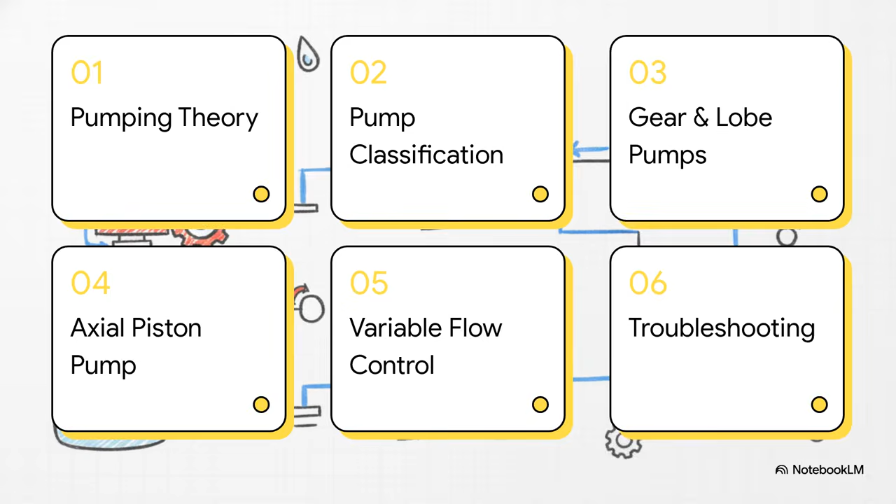All right, here's our roadmap for today. We'll start with pumping theory, move into pump classification, and explore gear and lobe pumps. Then we'll examine the axial piston pump, look at variable flow control, and finally wrap the whole thing up with some troubleshooting. Okay, let's kick things off with Section 1, Pumping Theory.

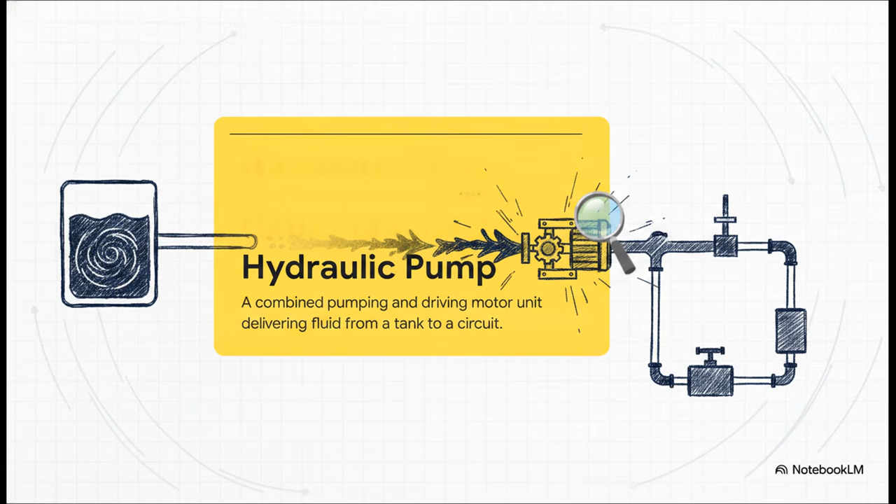Now, before we even think about moving metal parts, we really have to understand the fundamental physical challenge of moving liquid under extreme pressure and exactly how our machines actually overcome it. So, to ground ourselves, let's define what we're actually talking about here. A hydraulic pump is essentially a combined pumping and driving motor unit. Its entire reason for existing is to take hydraulic fluid, which is mostly just specialized oil, from a storage tank and forcefully deliver it to the rest of the hydraulic circuit. It acts as the primary driver. It's the thing that establishes the flow and literally wakes the entire system up.

And before we dive into the internal mechanics, I really want you to appreciate the sheer optimization of these things. When we talk about power efficiency, the ratio of output hydraulic power to the input mechanical or electrical power, these pumps aren't just good, they are extraordinary. We're talking about frequently hitting a staggering 90 to 98% efficiency. Almost zero energy is wasted.

But despite all that incredible efficiency, they do actually have a mortal enemy. It's called cavitation. Cavitation is the highly dangerous formation of tiny vapor cavities, basically little voids, in a liquid. And this happens when the fluid is subjected to a super rapid drop in pressure. Now, the real danger isn't the bubbles themselves, it's what happens next. When these voids travel into a higher pressure zone within the pump, they implode. This implosion generates these intense, microscopic shock waves that can literally pit and tear the solid metal of the pump apart over time. It's brutal.

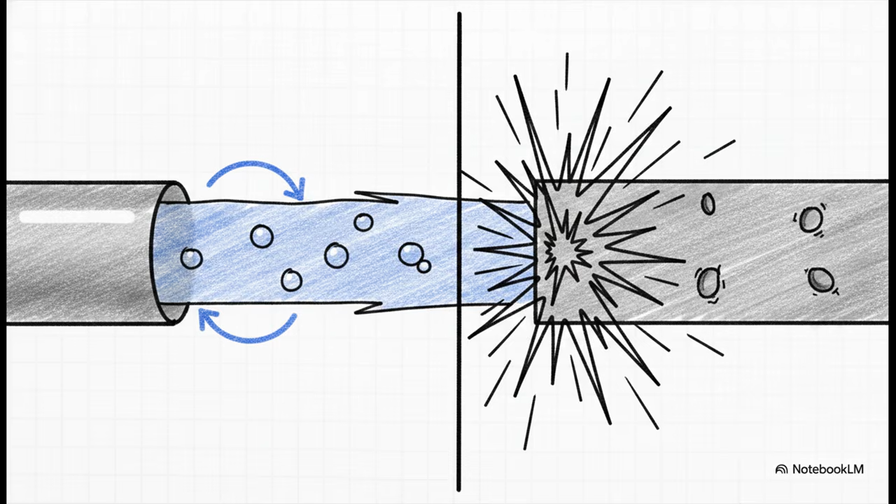So, to prevent that destructive cavitation, engineers have to be smart about system design. Think about a setup where the pump is placed above the fluid storage tank. The pump creates a negative pressure at the inlet, sure, but it's actually the atmospheric pressure pushing down on the fluid in the tank that forces the liquid up that inlet pipe. It's brilliant. To prevent those rapid pressure drops that cause cavitation, this pump lift distance must be kept as small as practically possible.

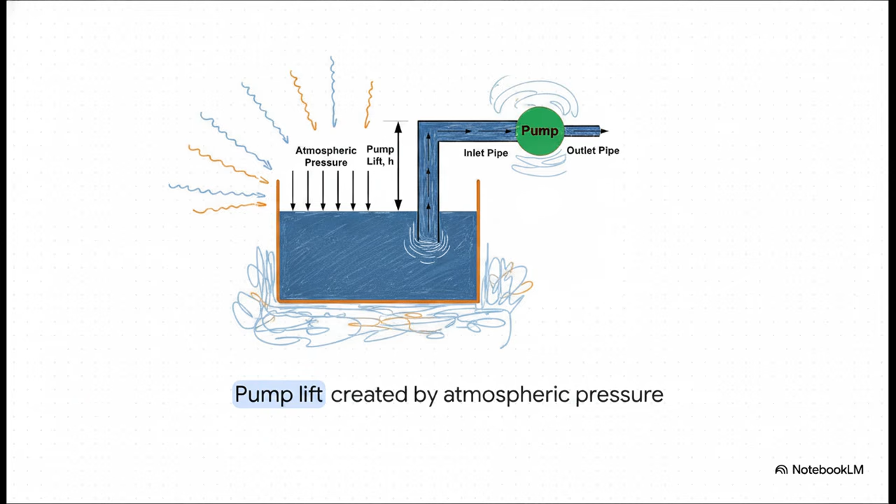Moving right along to Section 2, Pump Classification. We really need to draw a hard line here because there are two entirely different families of pumps. On one side, we have non-positive displacement pumps. Now, these are fantastic for high-volume applications, but they operate at a low pressure and their delivery varies wildly depending on the pressure at the outlet.

On the other side, though, we have positive displacement pumps. These are the absolute heavy lifters of the hydraulic world. They use super tight internal seals to trap and deliver exact, constant volumes of fluid at incredibly high pressures, completely independent of whatever pressure is fighting back at the output port.

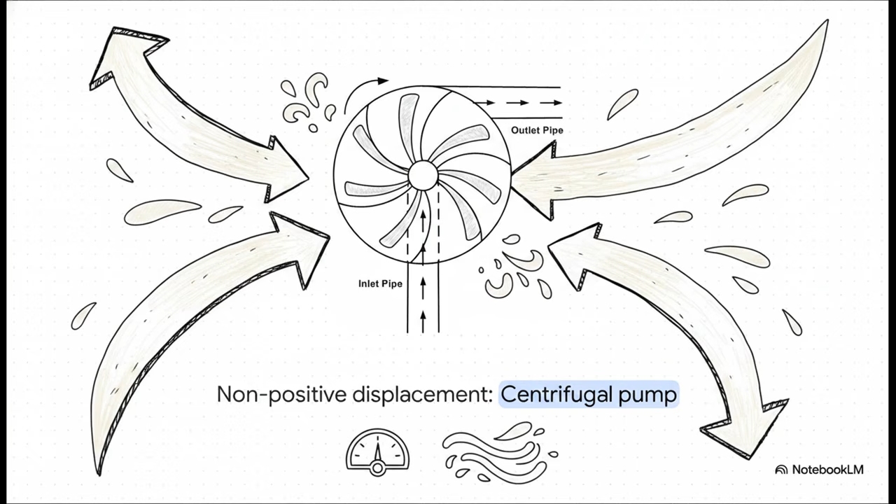Let's consider a classic non-positive displacement model, the centrifugal pump impeller. It uses rotational kinetic energy from an engine to just fling fluid outward to the periphery. Because it relies on centrifugal force instead of tight mechanical seals, it is perfect for moving massive volumes of liquid rapidly. But it's fundamentally limited to low-pressure applications, usually maxing out around 20 to 30 bars.

Contrast that entirely with a positive displacement or reciprocating pump. This acts remarkably like a four-stroke engine in your car. A piston moves down, opening an inlet valve to draw in a very specific volume of fluid. Then it moves up, the inlet closes, the outlet opens, and that exact volume is pushed out. Because of this sealed, rigid mechanical action, it delivers a constant volume with every single cycle. It doesn't care how much resistance or pressure is waiting at the output port, it just pushes it through.

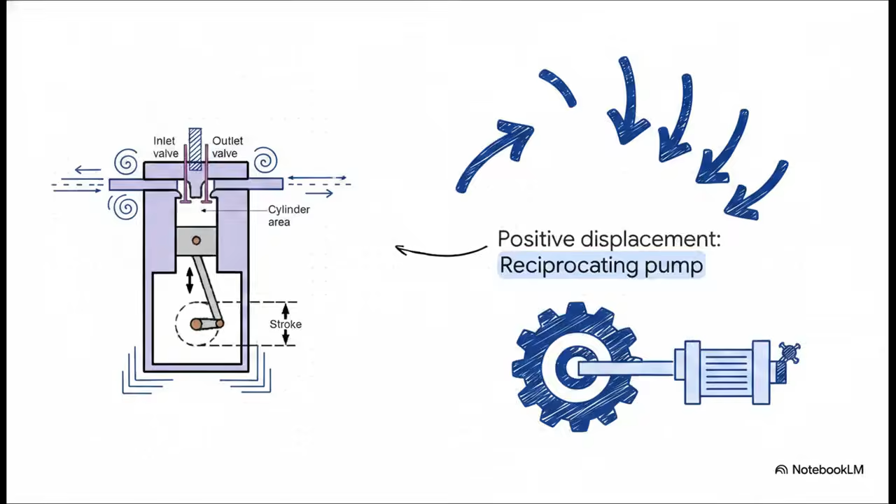All right, Section 3, Gear and Lobe Pumps. The external gear pump is an absolute workhorse in the industry. It features two meshing gears inside a housing. As the gears rotate out of mesh, they create a vacuum that draws fluid in.

That fluid is then trapped between the gear teeth and the outer casing, carried all the way around the outside, and forced out the high-pressure discharge port as the teeth violently mesh back together. It's incredibly effective, though I should mention it does have one notable drawback. The high pressure at the outlet and low pressure at the inlet creates an unbalanced side load on the gear bearings, which causes wear and tear over time.

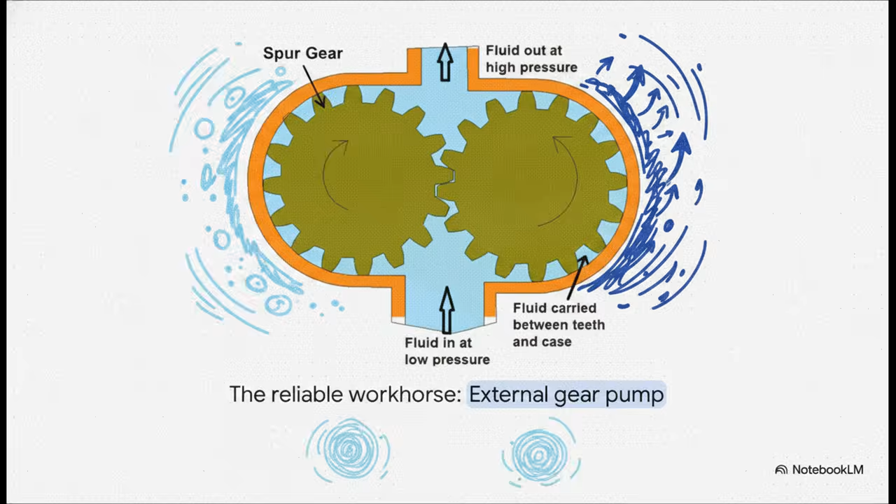Now, what's really fascinating is how the lobe pump takes that exact gear concept and adapts it for a totally different industry. The lobes rotating inside the housing do not actually make contact with each other. Instead, their rotation is perfectly synchronized by external timing gears. This gentle, non-contacting pumping action makes it a total superstar in the food, beverage, and pharmaceutical industries. You can literally pump delicate solids, I'm talking whole cherries or olives, right through this machinery without crushing or degrading the product at all.

We'll wrap up our gear tour by highlighting the internal gear pump. The absolute star of this design is the distinct crescent-shaped seal located right in the middle. Fluid enters and travels between the teeth of a large outer rotor and a smaller inner idler gear. That crescent perfectly and efficiently divides the liquid, acting as a dynamic seal between the suction and discharge ports right before the teeth mesh again to force the fluid out. It's just a brilliantly compact and versatile piece of engineering.

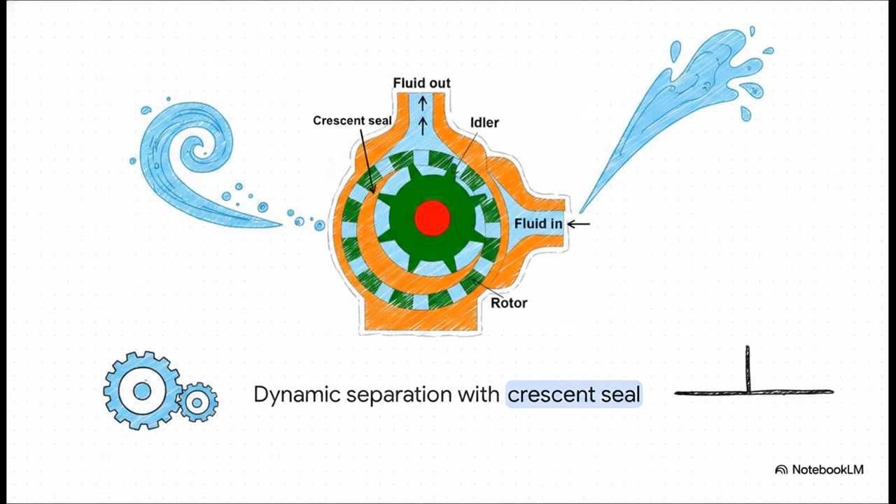Moving into Section 4, the axial piston pump. So if gear pumps are the reliable draft horses, the axial piston pump is the high-tech sports car. It represents the ultimate solution for precise, dynamic, and extremely high-pressure fluid volume control. Let's break down its continuous operational cycle into 4 steps. First, rotation. The drive shaft spins, causing the entire cylinder block and its internal pistons to spin right along with it.

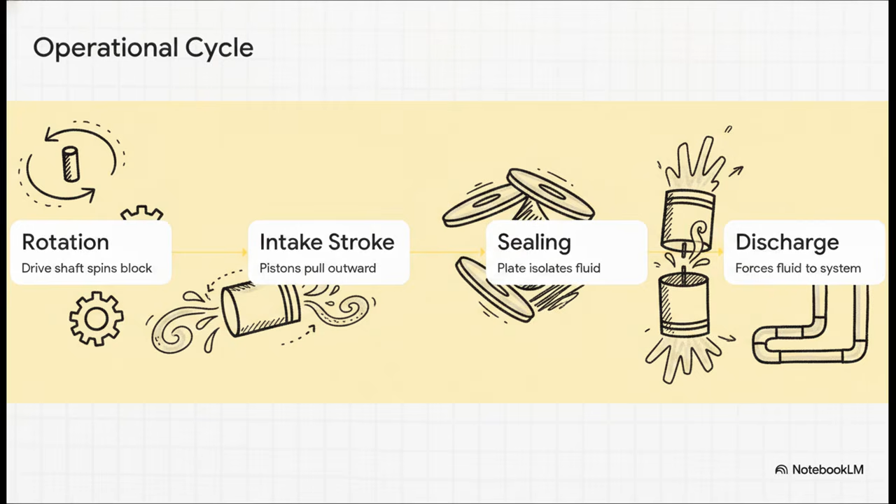Second is the intake stroke. As they rotate, the pistons are mechanically pulled outwards, creating a low-pressure vacuum that sucks hydraulic fluid into the cylinder. Third is sealing. A distribution plate isolates the inlet, securely trapping that ingested fluid. And finally, the discharge stroke. The pistons are forced violently back into the cylinder, decreasing the volume and blasting the trapped fluid out into the hydraulic system.

Which perfectly sets up Section 5, variable flow control. You might be wondering, how exactly are those pistons forced in and out as they spin? Well, the secret sauce lies in something called swash plate mechanics. This is the brilliant mechanism that allows this pump to actually vary its fluid displacement on the fly. The swash plate is essentially a flat disc that the ends of the pistons glide against. And the sequential logic here is just stunning.

If that swash plate is at a 0 angle, meaning it's perfectly perpendicular to the pistons, the spinning pistons don't move in and out at all, resulting in minimum stroke and 0 flow. But if a control mechanism tilts that swash plate to an increased angle, the pistons are literally forced to ride up and down that slope as they spin. Therefore, a greater tilt directly equals a larger piston stroke, which results in a much higher volume of fluid expelled into the machine.

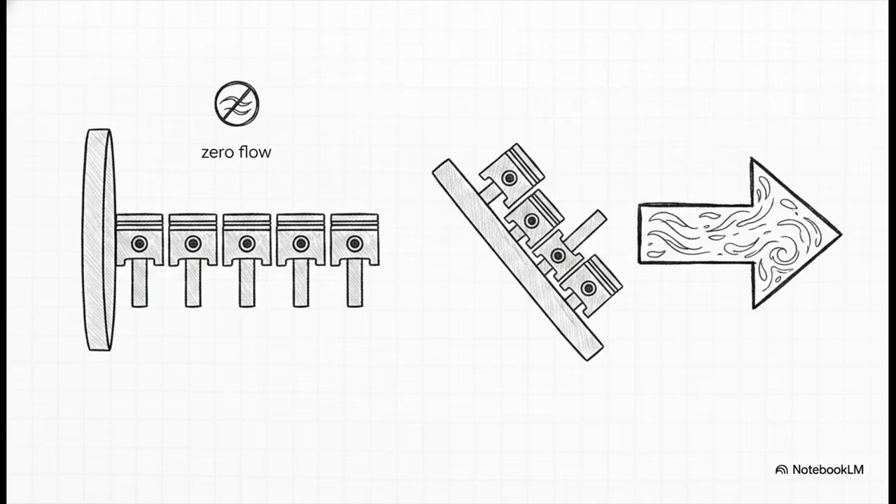And finally, Section 6, troubleshooting. Let's pivot away from pristine mechanical theory for a second and step into some gritty, practical reality. Imagine you're an industrial mechanic, and you've just been called in to diagnose a sluggish, struggling machine. Assuming the filters are clean and there's no visible damage on the outside, we have to look inside. The crucial point here is identifying 4 hidden culprits.

Number 1, internal leakage. This is often caused by worn piston rings allowing high-pressure fluid to just slip backward. Number 2, internal friction. This happens when sticky, varnished components sap the pump's mechanical efficiency. Number 3, control issues, like a faulty valve failing to properly adjust that swash plate angle we just talked about. And finally, number 4, air entrapment. This happens if air gets sucked into the suction line and it results in a terrible, spongy, and totally erratic response from the controls because those air pockets are actually compressing inside the pump.

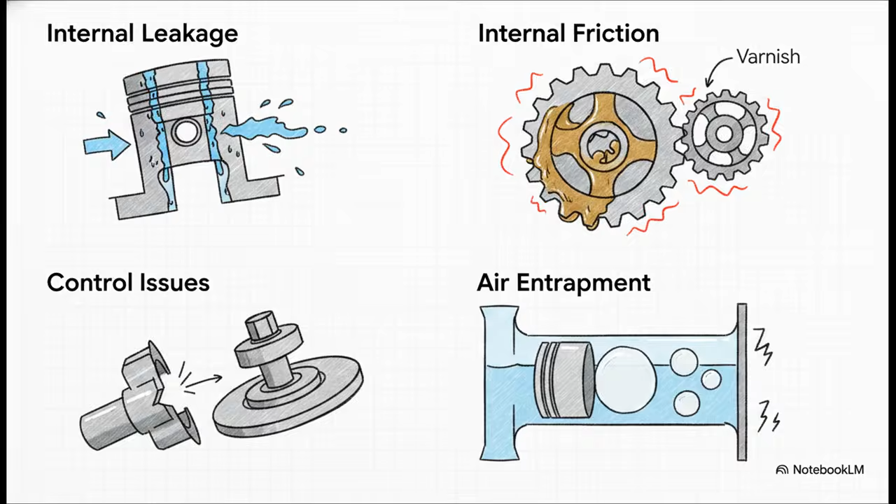Honestly, understanding these mechanical hearts gives us such a profound appreciation for the massive, complex world built around us, which leaves us with a pretty fascinating thought to ponder. As external electronic controls, load-sensing algorithms, and digital joysticks become infinitely more advanced, how will the dynamic, split-second precision of the swash plate continue to shape the highly automated, energy-saving heavy machinery of tomorrow? Because one thing is for sure, the mechanical heart is only getting smarter.